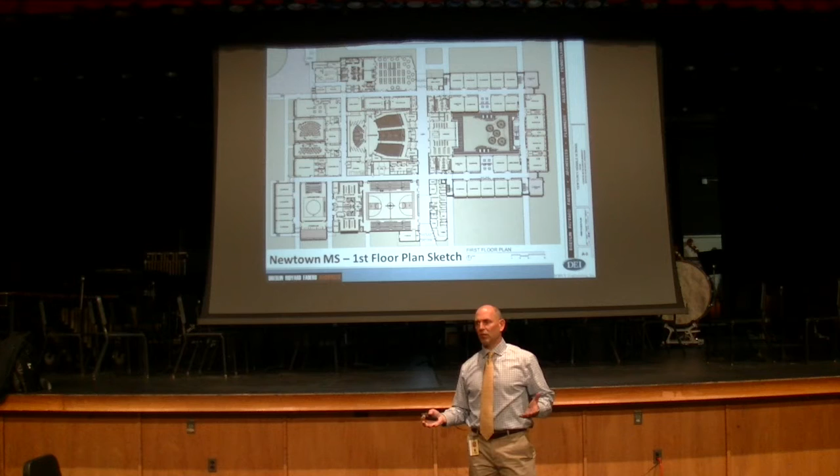And the ability to lock the building down across the classroom side and offer all those common spaces to you in the evenings, so that we can keep the students secure in those other spaces without folks running around in the evening. Works out real well from a design standpoint.

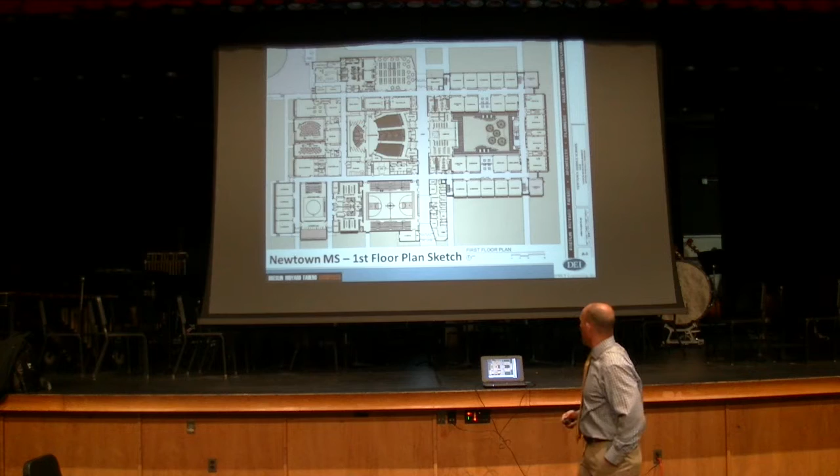The upper level, all the areas to the left are the same—these are just high volume spaces, so you're seeing the upper area of the same space. There is some mechanical space off to this side, but that's locked off; you can't get into that.

The classroom spaces are off to the right. Again, the upper area of the library. And we have some spaces here, collaborative spaces—those are breakout spaces outside of the classroom that staff and students can go to outside of the fixed, traditional rooms. You'll see those as well.

There's one upstairs and downstairs on each level over in here. A set of steps for circulation here and in all four corners, and an elevator at two locations as well. So the vertical circulation here is fantastic—you'll move around much better than you can in this building if you've ever tried to get through and around.

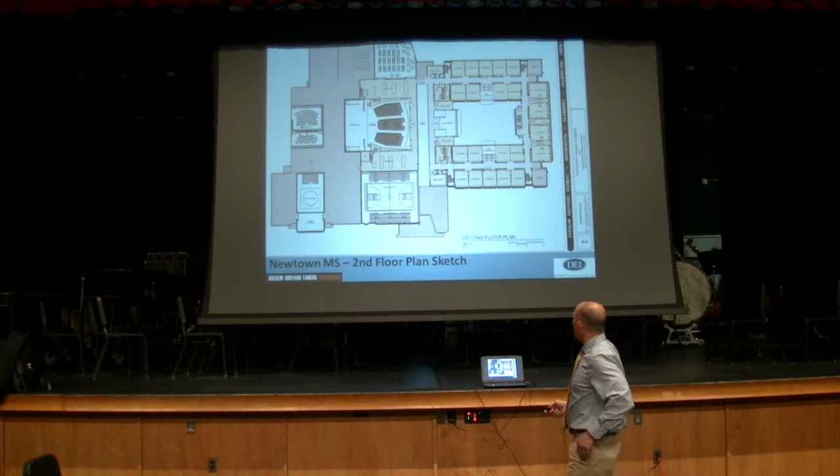This is the parent drop-off that I referenced across the top of the sheet. This is the administrative office and the entrance for those students and parents as well. The back of the building is where the buses drop off—they pull in and then pull away. This is the entrance where those students will go as they're dropped off from their buses.

This is the same entrance that we talked about. This is the office area, the reception area. When you come into the building, we will have a secure entry vestibule like you're used to—you'll be forced to come into the office before you can actually go into the rest of the building.

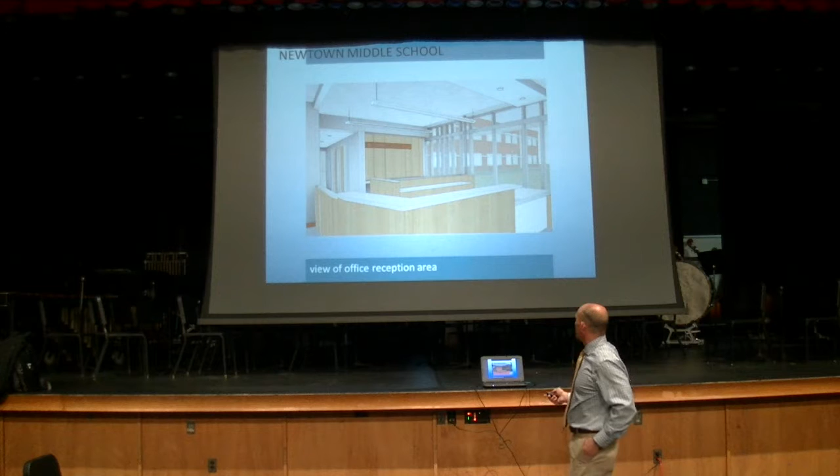This is the start of one of the corridor systems—this is what we talked about being Main Street. As you head down the hallway, just a bit further, it opens up. We have a high volume space, and we have daylighting that comes in, with windows up top to get borrowed light.

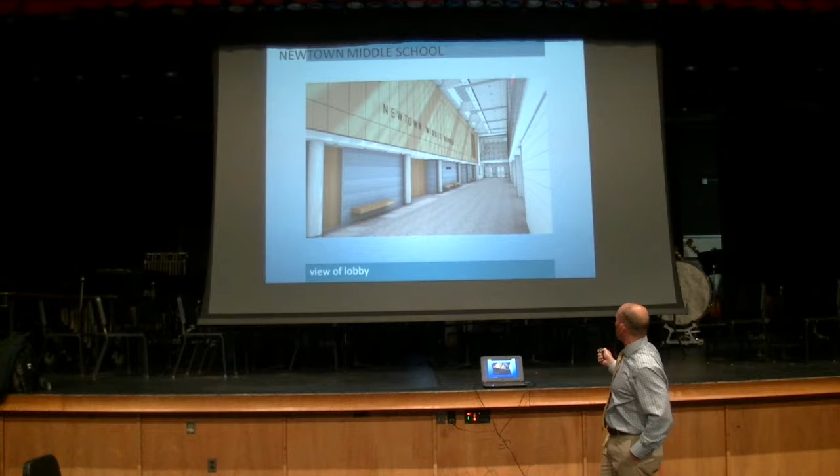A lot of this comes from the LEED design. Warren will talk more about the LEED design shortly.

Again, the corridor—you can see that even the spaces that are inboard, that don't have exterior windows, because of that high volume space, we'll get some natural light, some borrowed light into the building.

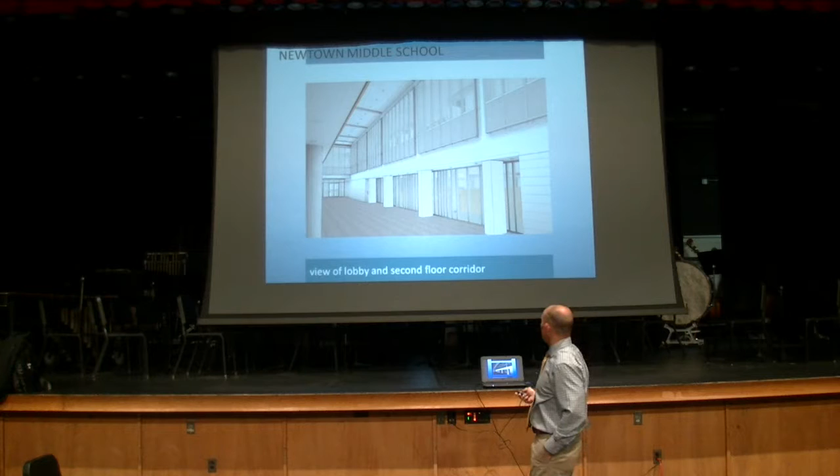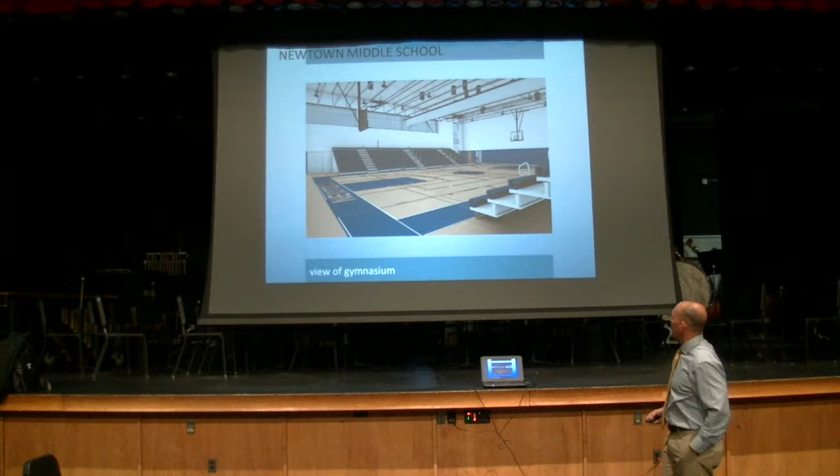Cafeteria space. This will be the new auditorium and stage. New gymnasium. Band room, orchestra room. Fitness center.

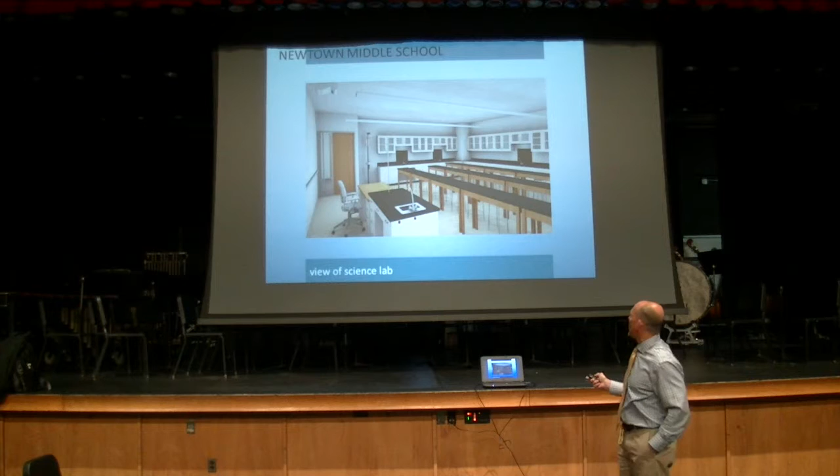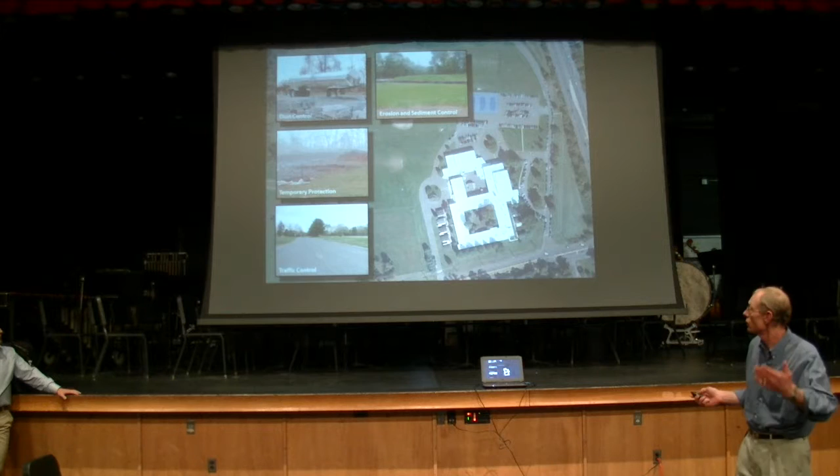Our role throughout this and with the community is always being sensitive and responsive to whatever your concerns are. I consider ourselves being very proactive with everything we do. But we certainly do miss something sometimes. We're human, we can't always be ahead of the curve. So if there is something, this is where I believe the sensitivity and proactive communication with you are our partners in this. We're not doing this alone. We're not doing it without Doug and his team and Tim and his team.

We also are doing it with you and for you. So if there is something you see that's out of the ordinary as you're driving by or something like that, I would ask you to contact Tim. Tim will be our point guard. He will get a hold of Colin, and we will address it, and you will get an answer one way or the other, whether it's been corrected or whether that's the normal thing. So please feel free to do that. That's what I believe is the proactive, sensitive response.

Yes, we will be on top of the contractors. We'll be enforcing all of those things. We work closely with the township, and we have up to this point, to get the building going. We've got a great team all together with Doug and his team, Breslin Architects, Terraform Engineers, Consolidated Engineering, our MEP. So we've got a great team, and I believe we've got a pretty good set of contractors as well.

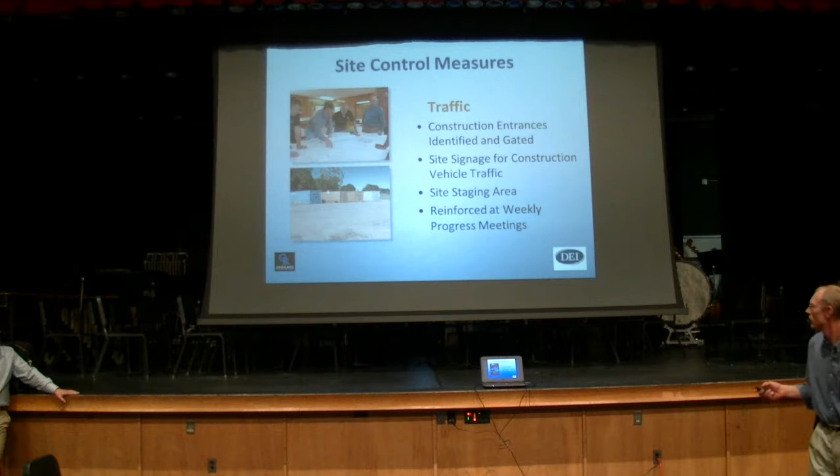So relative to site, what you're going to see soon is the gated chain link fencing going up around, permanent and otherwise. There will definitely be traffic signage. There will be gated entrances for the construction. There will also be stone washing and those kinds of areas. And then again, the other thing we really reinforce with the contractors is a weekly coordination meeting with them to make sure everybody's on board with what's going on.

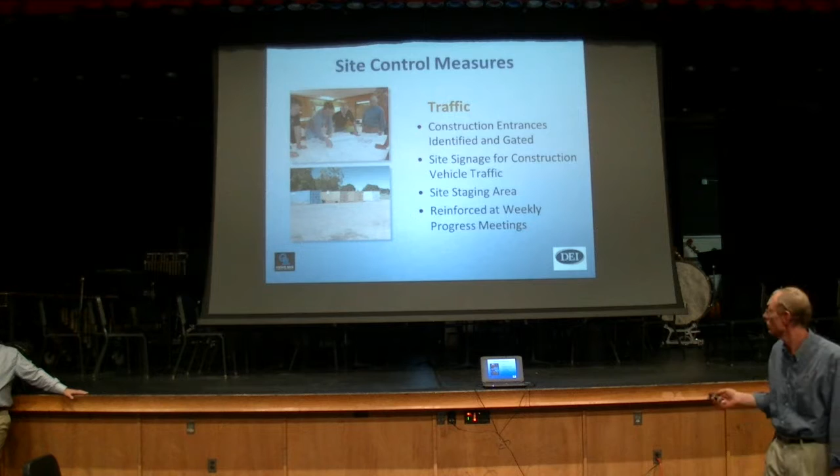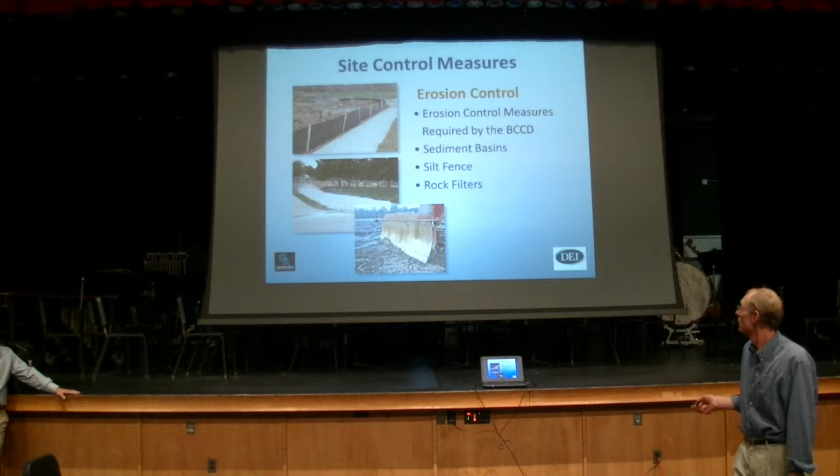Erosion and sediment, that's Bucks County Conservation District. There are measures we have to put in to ensure no sediment goes off the site. So you'll see a variety of silt fences in strategic places that they approve, and rock entrances for tire washing. We'd like to avoid any mud getting on the road. Unfortunately, I can't guarantee that 100%, but this is one way of doing it, and if something like that happens, we're on the contractors to get a street washer on site.

Some more of that relative to site control is the fencing. We've got a combination of permanent fence and movable fence. The movable fence is because we've got a multitude of phasing going on. So there's pretty much permanent fencing that goes around the outside perimeter of the site, and within our phasing you'll see the mobile type.

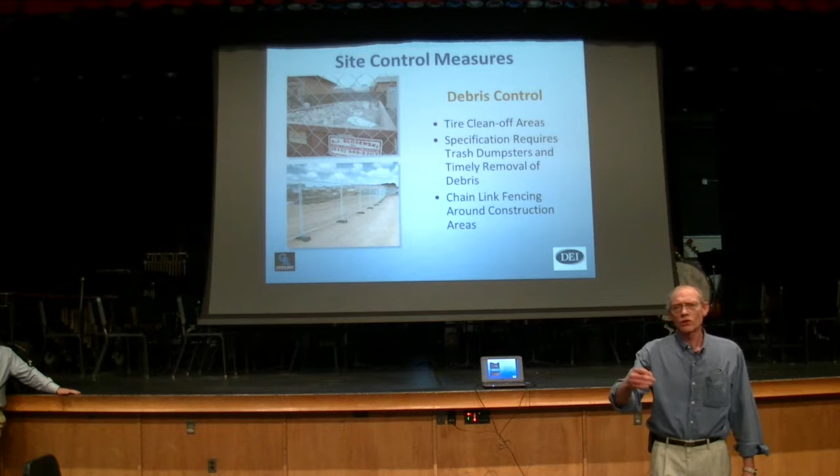One of them has to do with recycling all the material. So in order to get the LEED points for that, we have to certify that 75% of the construction debris is being recycled. So only 25% of any construction debris will actually end up in a landfill, and it's probably going to be less than that, because it's actually cheaper to recycle than to take it to a landfill. So that's one of the ways of doing it.

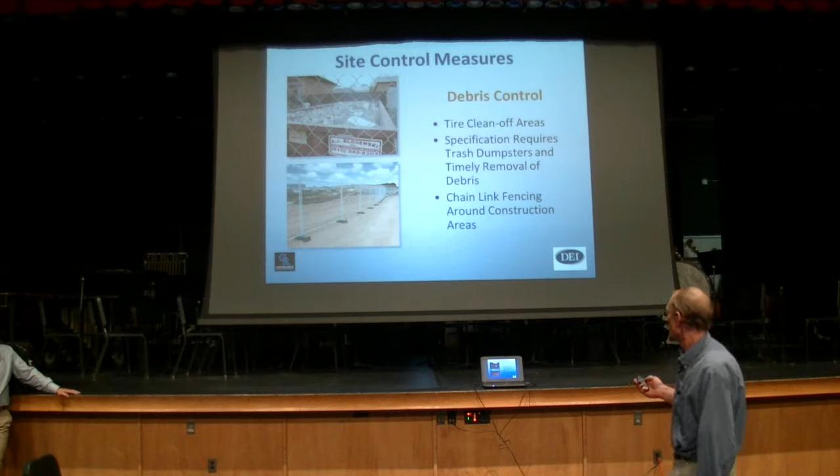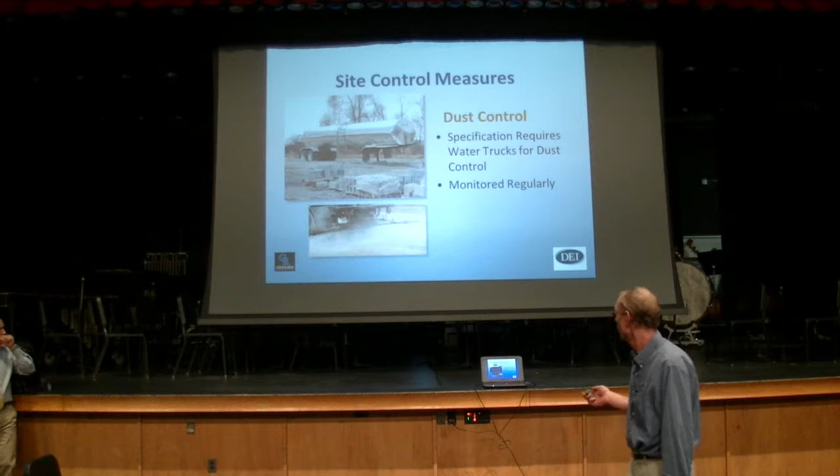Again, I talked about having a water truck close by for times when there could be a bit of dust happening. I believe there will be some site work happening now, and I don't think there's going to be a whole lot of dust related with that, even with the building pad. Probably the majority of dust will happen when they start to demolish this, so we'll have measures on hand for them to be wetting down the building as they begin to demolish it. We'll look at it on a regular basis and make sure it's happening.

Some of the existing features, as you know, basically you've got the tennis courts and temporary arrangements, but I guess you guys are going to be relocating some of those for the tennis things. We're going to be putting a temporary parking lot in here because some of the other parking area will be taken away from you guys for a little bit. So there's the removal of the tennis courts to put the building pad in. There will be some slight reconfiguring of the parent drop-off as it is now, but it really won't affect anything. You'll probably see some additional signage or direction, but for the most part it's going to be pretty much unchanged.

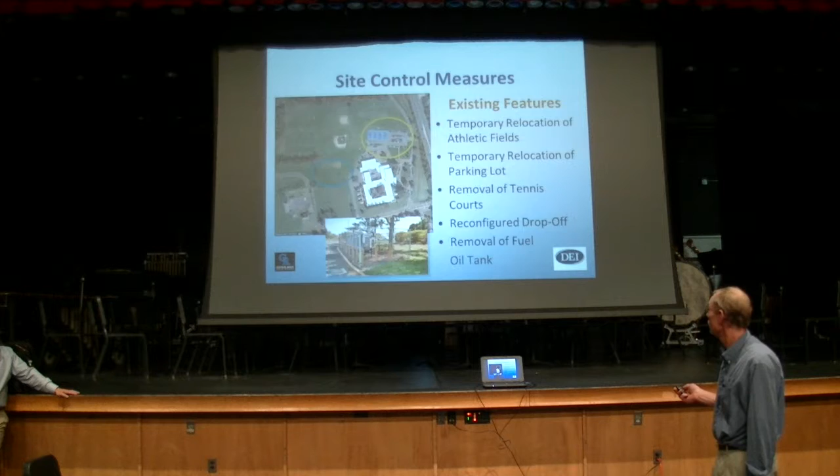Temporary things. Doug, you want to address this with the trees? You talked about this last time. Yeah, sure. Well, we know we have some memorial trees and plantings around the facility. Those have been identified. Those we can move, we will move. Those we can't, we will replant a new tree in memory of the same person and relocate the memorial along with it. So we're being sensitive to the things around the building.

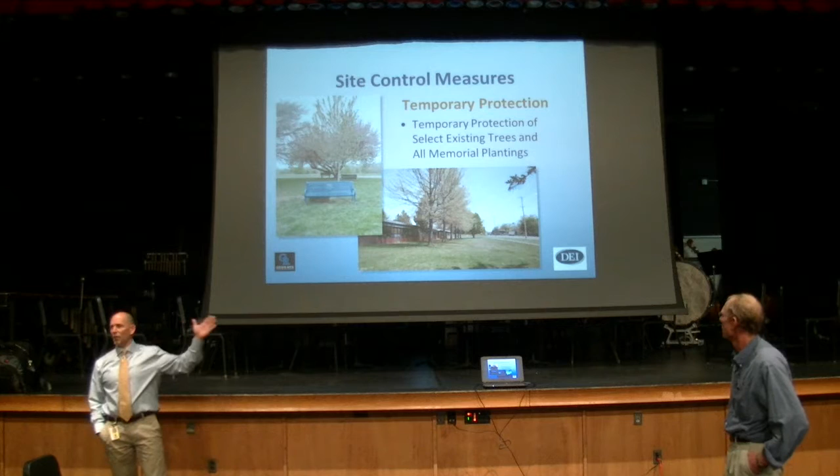In addition, some of the first design concepts for this building were to take the row of oak trees along Newtown Richboro Road and remove them to create an embankment and maximize the area for the new soccer field. After further studies, we felt we could still facilitate a sizable regulation soccer field and maintain those trees. Because we're being green, LEED stewards of the earth, we wanted to save those trees, so we're able to salvage them. The protection we're talking about will be putting fencing around those so they're not damaged as we demolish the existing building.

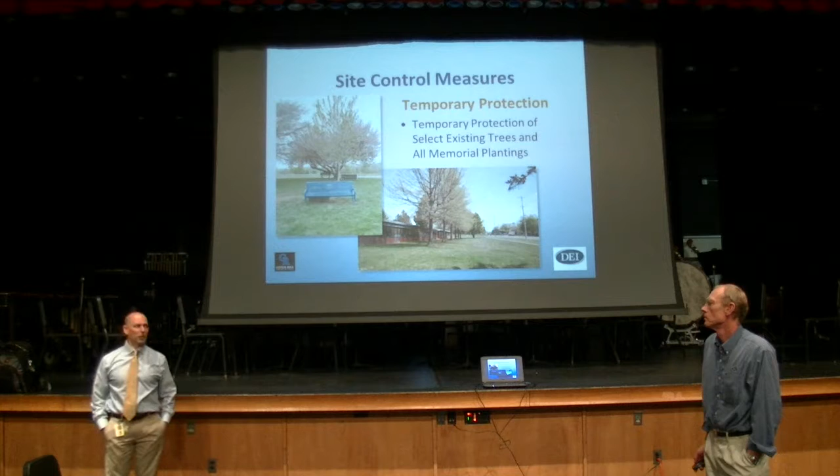We have a lot of site utilities to install, including all the new services to the new building. But the other big one is relative to storm management. There are about 4 underground storm management basins with big perforated pipe that, once installed, you won't even see because it's underground.

We also have some special meters going in. With the LEED portion of it, think of your house: you have your electrical meter, maybe a gas meter and a water meter. It's not much different for a big building, but to also get LEED points, it's recognized for teaching points. So we're putting specific meters at strategic locations in the building so they can read power and water consumption for small portions of the building and analyze that in a different way.

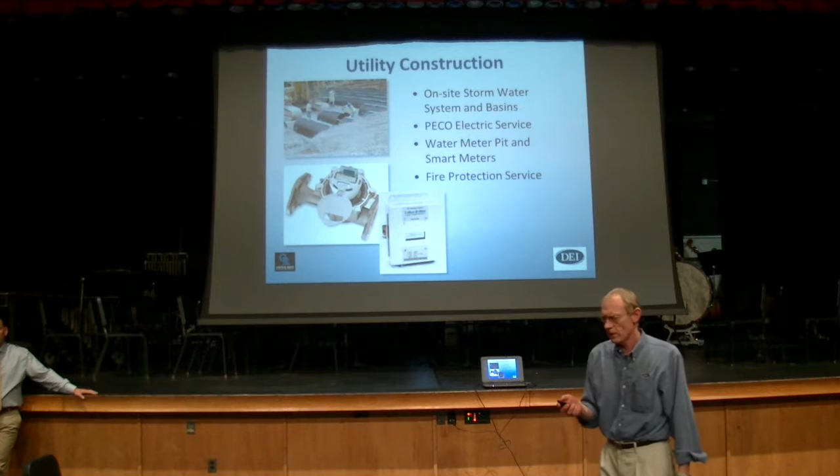The other thing happening is that this building is going to have solar panels for about 3% of your power. That will also have a dashboard able to analyze all the power coming in and being consumed, and that's also a learning tool that's going to be part of it. So lots of new and exciting things will be in this building.

In the construction phase, you will shortly see us start stabilizing the site. We talked about the pedestrian and vehicular circulation and that temporary parking. Basically, you're going to see the equipment coming in and starting up to do the storm management and some temporary roadways that will happen within.

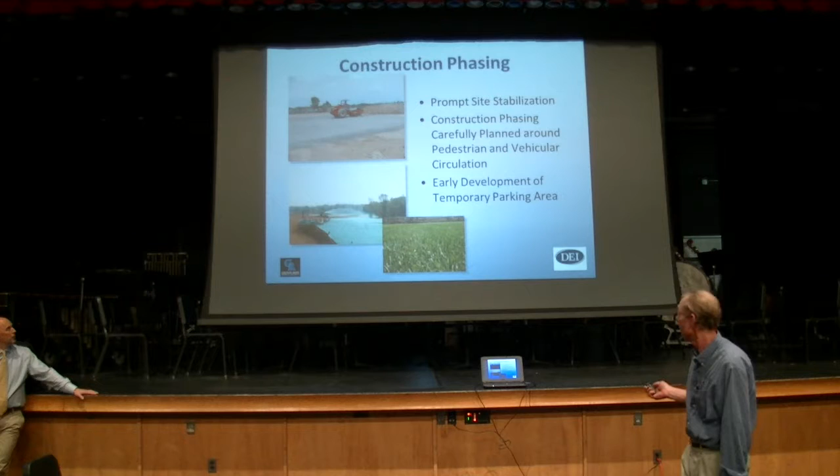Clearances: the one thing all construction workers have to do is register with the school district. They send in all the variety of clearances needed, those are reviewed by the district, and the district gives us a list of approved contractors and their employees. Once approved and let on site, they get a badge similar to this one, which was used over at Goodnoe. It will have a number on it that we register to identify that employee, so we know exactly who belongs to what in case of any incident.

I haven't had any issues, which is nice, because there are a lot of good guys, and we've heard at both of the other projects how friendly and helpful the contractors have been. So it is a process, and nobody likes it that much because it keeps getting larger all the time, but it basically keeps the children, students, and staff around here safe. We really don't need to worry about the temporary partitions at this point. This was a little bit based on the Holland job with the phasing, but the badge process remains.

Environmental concerns: we have an environmental consultant on site. In the near future, he will take indoor air testing of this facility so we get a baseline of what that is, just in case there are concerns that may arise with construction, so we can have a measure to compare against. We're not anticipating any problems, but it's always smart to have a baseline before you start.

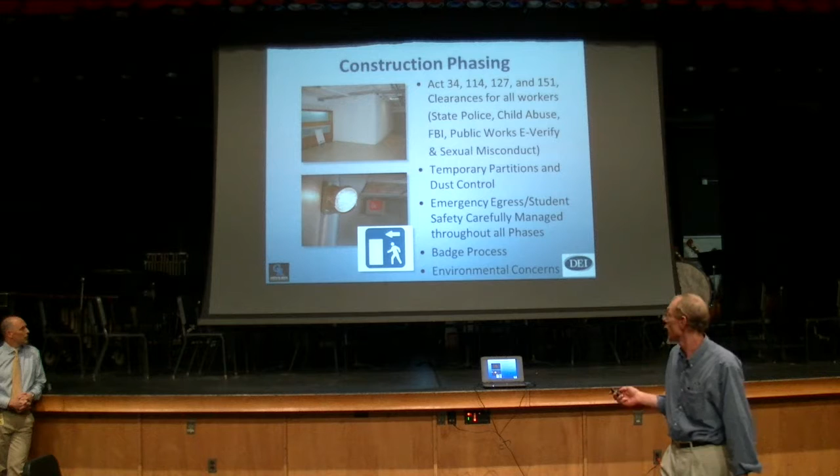Okay, now let's get into the boring stuff, since Doug had the exciting stuff. These are our phasing drawings, and I'm going to go through them quickly. On the bottom corner you'll see the start and finish date. This phase basically starts this week and goes till the end of the school year.

On all of our phasing drawings, we have a milestone schedule which identifies key areas of activities that have to be incorporated into the schedule by the contractor, and that helps move the project along.

Next phase is basically the summer hop, as I call it. This is redirecting the fence into a larger area, establishing other key elements for us like entryways, doing all the E&S measures, continuing with storm management and piping, and beginning to get our temporary roadway and construction staging into effect.

The building probably will not start until September, unless some really good things happen in the summer, but it's not really planned to start foundations until September.

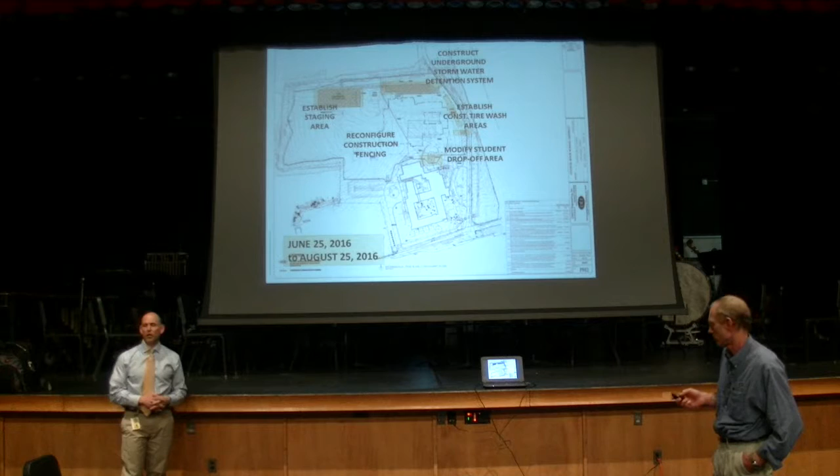So that's one of the reasons why we have to take the entire site as early as we do, in case there's any question to that.

Through this, because we're taking this off, there's a little bit of reconfiguration of that student drop-off, but really what you're going to see is just some fencing and some signage to help you get through that. Should not be that big of an issue for anyone.

From June, again, this is just a little bit of what we like to try and do with the summer bounces, because it just means we have more things to do in other places, and that's why we always have something planned for the summer.

Now we're putting the permanent storm management in. If you remember that picture with all those big pipes, that's going to be in this area. We're going to start getting all the sidewalks and the roadways ready, which is always best to do when we basically don't have any other traffic in the area. And again, we're going to finish the building.

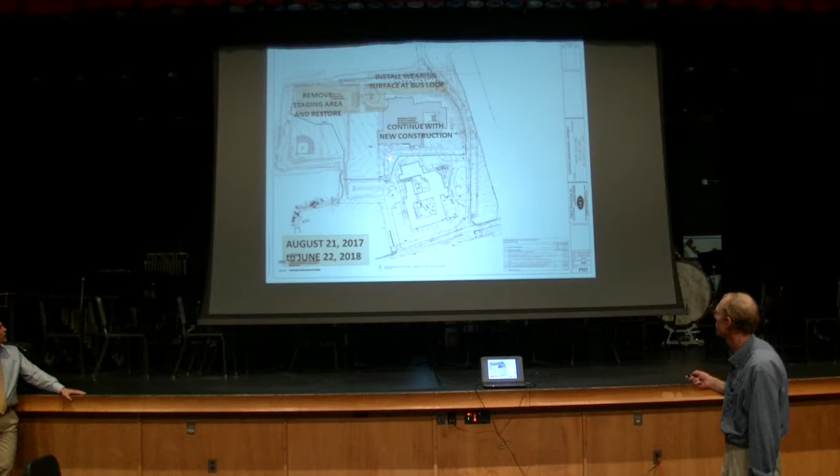What we're doing is basically getting all the fields prepped and ready, removing our staging area, getting the bus loop finished, getting all of the various parking lots and sidewalks all finished and landscaped, and then we're going to hop down to the demolition, taking care of that and finishing that little piece of parking lot off that we took away.

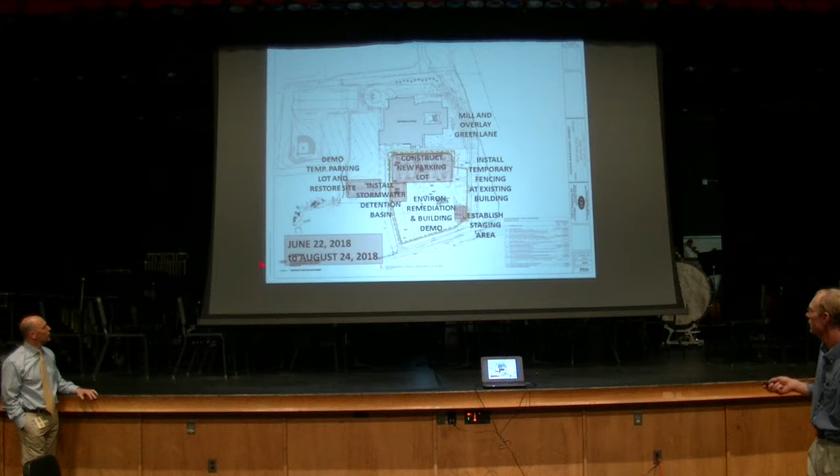This is the line of trees that Doug was talking about, right there—you can just see them on the bottom. So basically the field will end up in there with the trees still being there. And we will actually mill and overlay Green Lane at the end of it. We'll get rid of the fencing, and by August of '18, we will be gone.

When we're working on the demolition of the existing building, you can see that yellow line around it—we have a construction fence established around that area, much as we had on the other side of the site. So we move the protection of that area around it, construct the new lot, and we have a stone tire wash as well. That's treated as its own construction project and properly protected so students can't enter that site.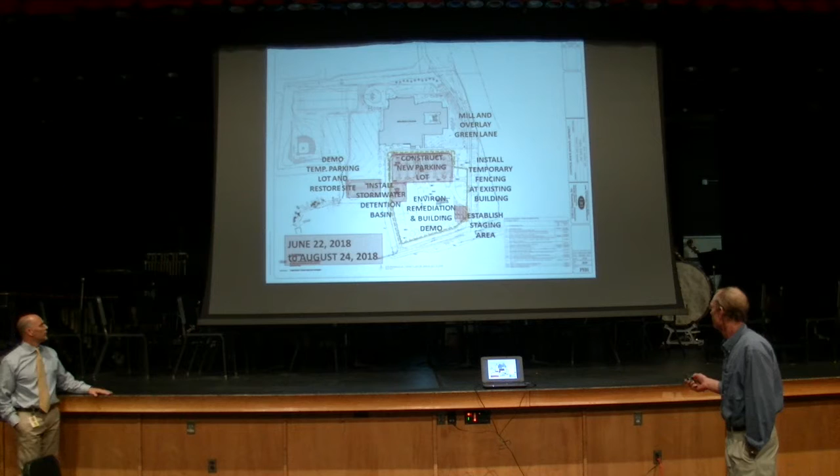During that whole time, Colin's role, and my role to assist, is to make sure everybody is safe and content with what we're doing on site, moving this forward in a direction that's positive for everybody. We will be communicating with all, though Doug and I haven't established exactly how. We may do a semi-annual PowerPoint for you, those kinds of things. But again, we are your people. We are working with you as a team, and I can't emphasize enough that we are only a couple of guys, but we are very efficient, and we depend on being a good neighbor to you and having you as good neighbors help us through this process if you see something out of the ordinary.

And I think that's about it.

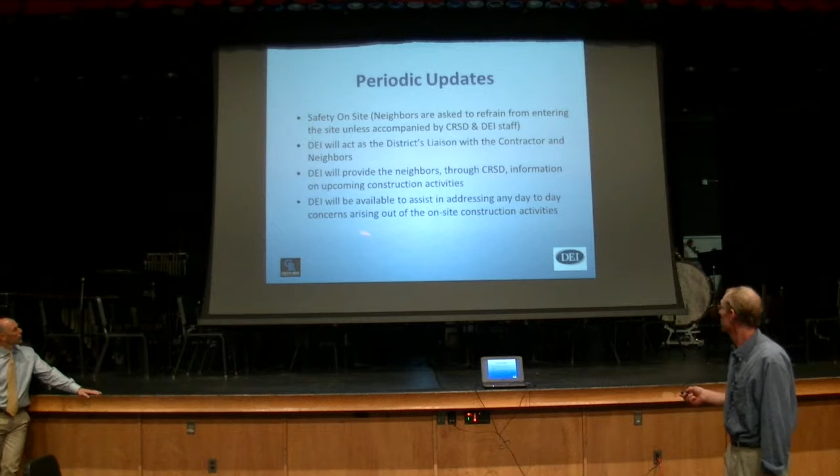So before we open up for questions, note that while Warren said there are a couple of guys, they're also supported by a sizable office and great staff with specialists in all areas, which is another reason they're here. They have experts who can address any issues on site. What I like about them, in addition, is that they are not finger pointers, they're problem solvers. So when we have issues during construction, we're not sitting in a trailer wasting time pointing to each other asking whose fault it is. We're resolving the problem and keeping the project moving. As Warren said, we have 2 years to build this new building. We can't afford wasted time, so we will all work together to move forward in a positive way. It's been great - they've demonstrated that at the last 2 projects, and I expect the same here.

With that, I would love to hear any concerns, comments, or questions. I see you have two questions.

The tennis courts - they're going away. Are they being replaced, or are there other plans for tennis to be performed elsewhere? The tennis courts are being removed, and they're not planned to be reconstructed here.

So if kids are in the tennis club now, is there going to be a tennis club going forward? Maybe they would use another location? I would have to get an answer on how clubs would work down the road.

And then, is this going to impact 8th grade promotion at all? I've never done it here, so I don't have familiarity with how it works. Since there's going to be construction and whatnot going on during May to June, is that going to affect how promotion is handled? No, it will not impact that at all.